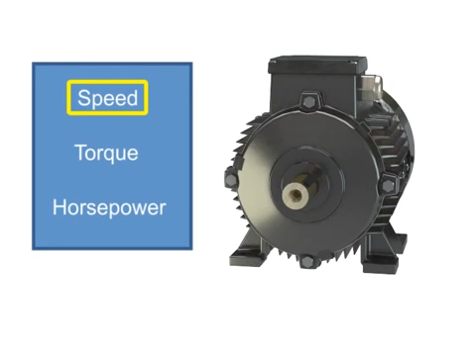The three factors that determine the type of work a motor can produce are speed, torque, and horsepower. Speed is defined as how fast the motor performs its work. For example, a shaft can rotate slowly or quickly. The typical units of measurement for rotational motor speed are revolutions per minute, or RPM.

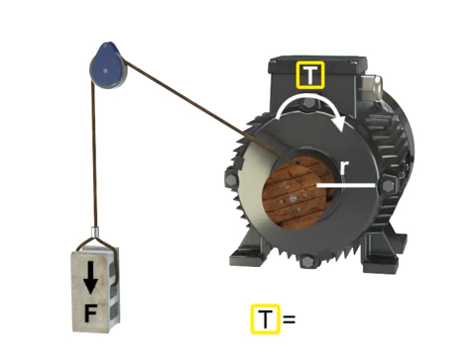Work is defined as a force applied over a distance. In the case of flywheels, winches, and motors, the work is called torque. Torque is a special type of work that produces rotation. Torque occurs when a force acts on a radius. Typical units of measurement for torque are pound-foot. The torque illustrated here is equal to 1 pound-foot.

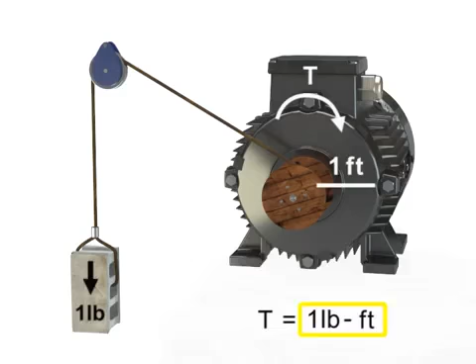Horsepower is defined as the rate at which work is accomplished. Years ago, before motors were invented, most work was accomplished manually. It was estimated that one horse could accomplish approximately 33,000 pound-foot of work per minute, and thus the term horsepower was born. In modern terms, horsepower is simply another unit of measurement for power and can be translated into watts, BTUs, joules, or any unit of power. Units that measure motor power are typically in horsepower or watts.

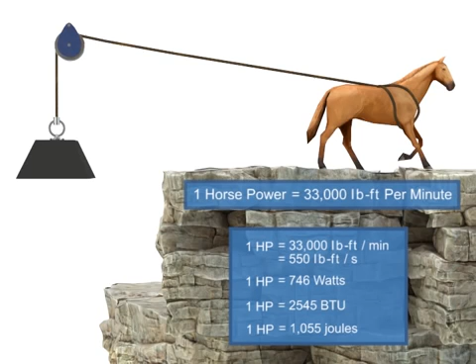You can manipulate the connection among speed, torque, and horsepower by understanding how they are related. The work accomplished here, the torque, is represented by the weight moving along the conveyor. If torque remains constant, speed and horsepower are proportional. As the speed, or RPM, increases, horsepower increases to maintain constant torque. If speed decreases, horsepower decreases to maintain constant torque.

Let's say we wish to keep torque constant but want to increase the production of barrels. If the torque or number of barrels on the conveyor belt remains constant but speed increases, then the horsepower of the motor also increases. In other words, a more powerful motor is required to produce the same amount of torque more quickly. Similarly, the opposite is true. If we wish torque to remain constant and decrease speed, then the horsepower of the motor also decreases.

If speed remains constant, then torque and horsepower are proportional. As the torque increases, horsepower also increases to maintain constant speed. As the torque decreases, horsepower also decreases to maintain constant RPM.

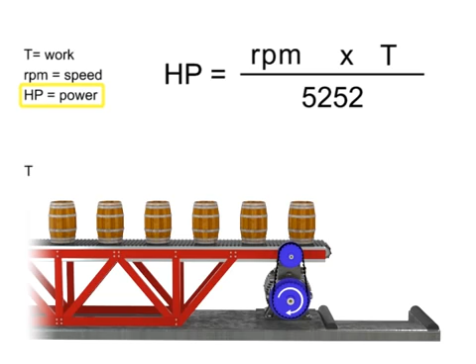If horsepower remains constant, then speed and torque are inversely proportional. As the torque increases, speed decreases to maintain constant horsepower. As torque decreases, speed must increase to maintain constant horsepower.

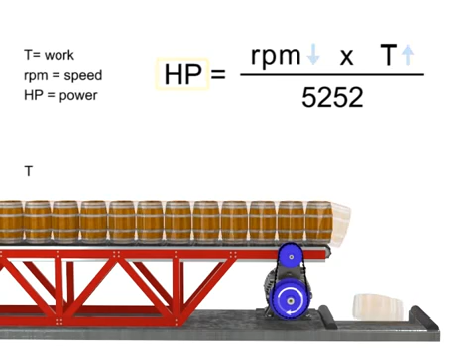Let's say we want the horsepower of our motor to remain constant, but wish to increase the torque. If torque increases, the speed of the conveyor decreases, so that the horsepower required of the motor remains constant. Similarly, the opposite is true. If the torque decreases, the speed of the conveyor increases, and the horsepower generated by the motor remains constant.

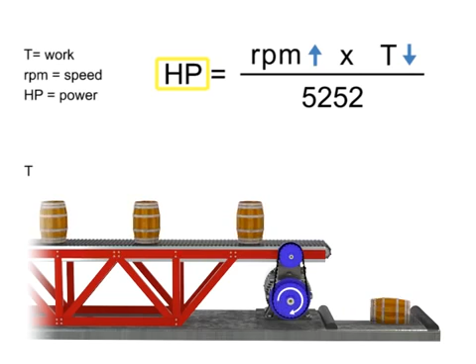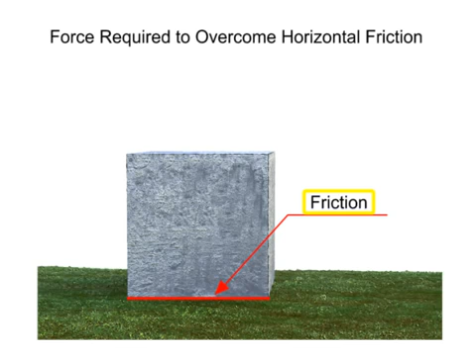To calculate the amount of horsepower required to move a horizontal load, we must first consider the occurrence of sliding friction. Friction occurs when two materials resist moving against one another. For example, it's much easier to pull a block of metal across a smooth field of ice than it is to pull it across a rocky path. The friction between the block and the rocks is greater than the friction between metal and ice.

The amount of friction generated depends primarily on the materials which are in sliding contact. The coefficient of friction, symbolized by the Greek letter mu, is a dimensionless quantity which describes the ratio of the force of the friction between two bodies and the force of them pressing together.

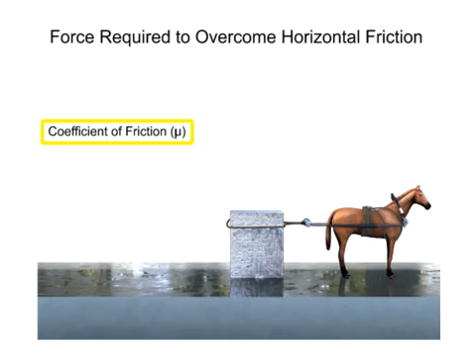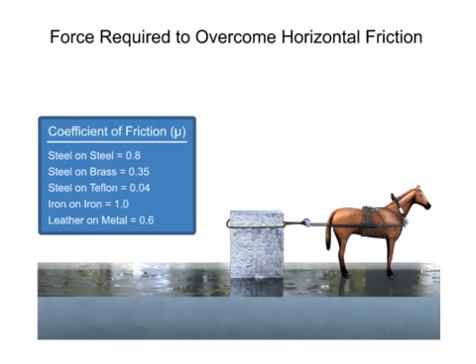This coefficient can be used to help determine the amount of force required to move a load horizontally across a surface. Many manufacturing handbooks contain tables that publish the coefficient of friction for common materials. The amount of force required to slide a load and overcome the surface friction is calculated by multiplying the coefficient of friction by the weight of the load.

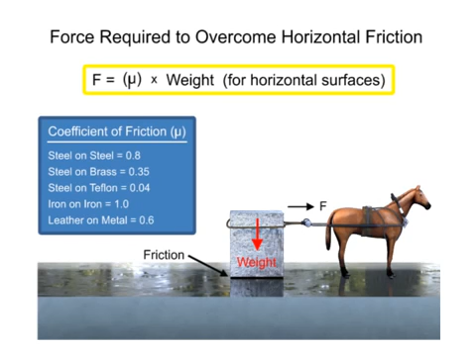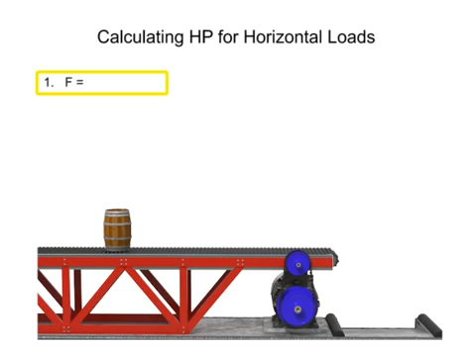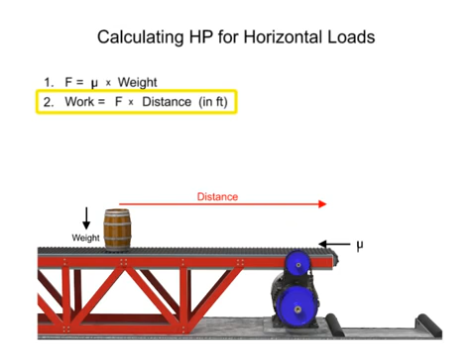Once this force is determined, it's easy to calculate the required horsepower to move a horizontal load. First, find the horizontal force required by multiplying the coefficient of friction by the weight. Then, determine the amount of work required by multiplying the force by the distance in feet to be moved. Next, calculate the power by dividing the work by the time in minutes. Then, convert to horsepower by dividing the result by 33,000. Finally, add 5% to compensate for estimated friction losses in the motor or cylinder.

Let's try an example. Assume the barrel weighs 100 pounds. The coefficient of friction between the belt and the platform is 0.3, and the barrels move 20 feet in 0.1 minutes. We can determine the horsepower required of the conveyor motor by accomplishing the following calculations. First, find the horizontal force required by multiplying the coefficient of friction by the force of the weight, which is 100 pounds. In this system, the horizontal force is 30 pounds.

Then, determine the amount of work required by multiplying the force by the distance, 20 feet. For this system, the work required is 600 foot-pounds. Next, calculate the power by taking the work and dividing by the time, 0.1 minutes. The power is equal to 6,000 foot-pounds per minute. Then convert to horsepower by dividing the result by 33,000. This yields a result of 0.18 horsepower.

Finally, add 5% to compensate for estimated friction losses in the motor or cylinder. The final result is 0.19 horsepower. With this result, system designers can ensure the right size motor is available to operate the conveyor.

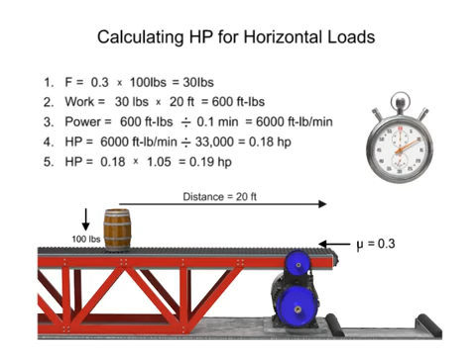If the distance to be traveled isn't on a horizontal surface, the angle of the surface must be taken into account. To determine the total force required, we must add the force required to raise the load to a higher elevation with the force required to overcome the friction. The total force is equal to the weight times sine A plus the weight times the coefficient of friction times cosine A.

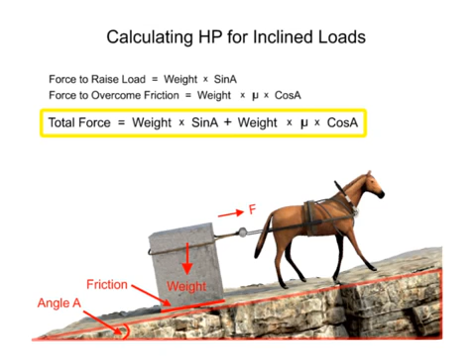Once these two forces are combined, we can continue with the same steps used previously to calculate the size of the motor required. First, find the horizontal force required by adding the force required to raise the load to a higher elevation with the force required to overcome the friction. In this system, the horizontal force is 75.98 pounds. Then determine the amount of work required by multiplying the force by the distance, 20 feet. For this system, the work required is 1,519.6 foot-pounds. Next, calculate the power by taking the work and dividing by the time, 0.1 minutes.

The power is equal to 15,196 foot-pounds per minute. Then convert to horsepower by dividing the result by 33,000. This yields a result of 0.46 horsepower. Finally, add 5% to compensate for estimated friction losses in the motor or cylinder. The final result is 0.48 horsepower. With this result, system designers can ensure the right size motor is available to operate the conveyor on an incline. As expected, it takes a stronger motor to move weight up an incline than on a horizontal surface.

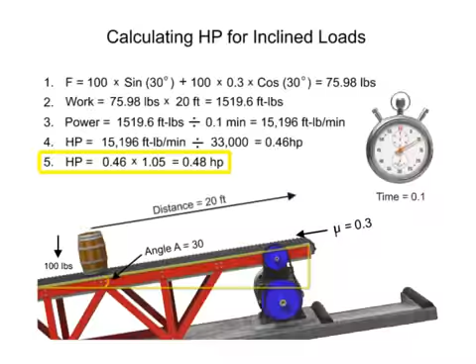The relationships among horsepower, speed, RPM, work, power, and force allow technicians and system designers to determine the appropriate characteristics of motors, cylinders, and other fluid system components required to operate any system.